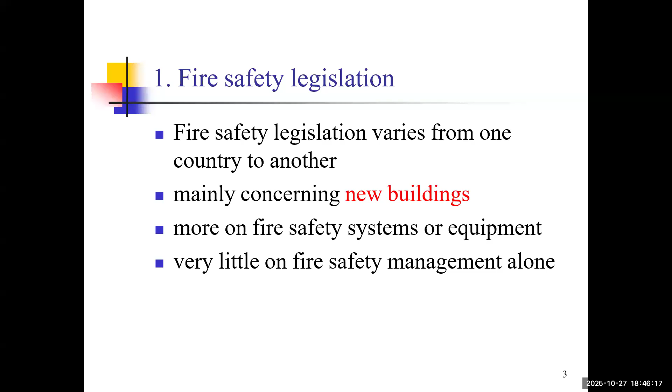Despite the differences we have just mentioned, close analysis reveals that several common features run through most international fire safety frameworks. The first is that legislation typically applies more to workplaces and public buildings rather than private homes, reflecting a greater concentration of risk and public responsibility.

The primary focus is definitely on life safety, that is, ensuring the survival and safe egress of occupants, rather than on protection of the building structure or its contents. This often has a beneficial secondary effect: building standards for the safety of firefighters and for prevention of the spread of fire to adjacent areas are also a consideration.

And importantly, most countries and states operate two different systems, treating new buildings and existing buildings differently under their legal framework, because of the practical and economic challenges of retrofitting safety features into old structures.

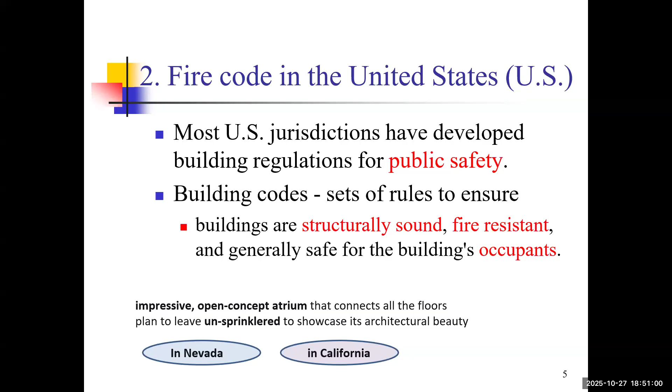But if you submit the exact same design to California, the authorities would likely reject it. Why would they reject your design? Because in California, the code has a blanket rule stating all atriums must be protected by an automatic sprinkler system, with no exception for engineering analysis in such particular cases.

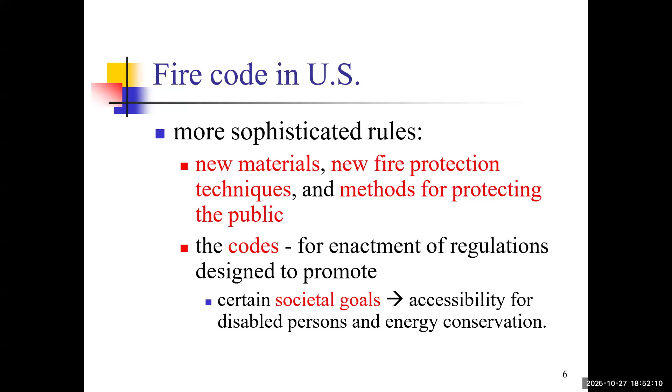The sophistication of the modern US fire codes reflects an ongoing and necessary adaptation to a changing world. They continuously integrate knowledge about new materials, innovative fire protection techniques, and evolving methods for protecting a diverse public. Interestingly, the function of these codes has expanded beyond their primary fire safety instruction to serve broader society goals. It is now common for building and fire codes to include provisions that promote accessibility for disabled persons and incorporate energy conservation measures. This expansion demonstrates how fire safety codes or regulations can act as a powerful driver for positive social change and sustainability, far beyond their immediate purpose of life safety.

In order to truly understand the US system, we must capture its defining characteristic, which is significant regulatory fragmentation. There is no single national code, no single national fire code. Instead, there are multiple overlapping sources of regulation and numerous pathways for the publication of standards.

If we consider the foundation structure, in the US we have 50 states, and each state has its own constitution and legal system. Within this constitution and legal system, the state can delegate the authority for fire safety regulation further down to local communities. This creates a very complex and multi-layered patchwork of requirements. For people designing buildings, this means that the rules can change literally from one town to the next. What's fine in one city might be illegal in the next city. That is a big problem.

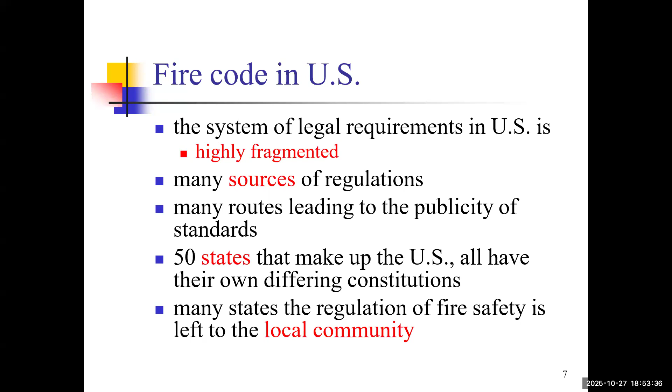This presents particular difficulties for design professionals and corporations working across multiple jurisdiction boundaries. So the US system is fundamentally self-regulatory in nature, meaning that the primary responsibility for most public health, safety, and welfare regulation falls to state government, which in turn often delegates to local and regional jurisdictions.

So what does this mean? This creates both valuable flexibility and considerable complexity in implementation, requiring a highly specialized understanding of local laws for successful project delivery. For example, a national retail chain must ensure that each of its stores complies with the specific fire code of that city or county.

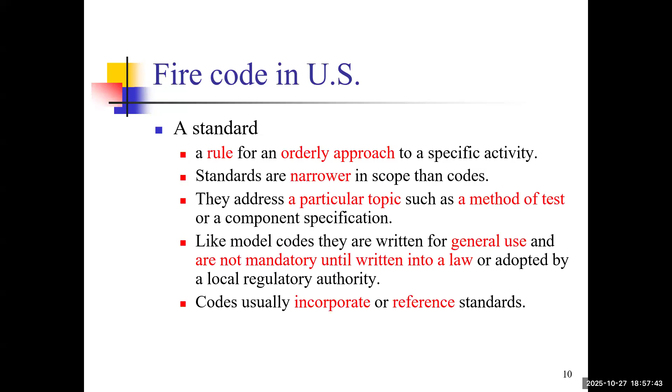Like model codes, standards are written for general use but are not mandatory in themselves. They only become legally enforceable once they are written into law or adopted by local regulatory authorities. In practice, codes usually incorporate even hundreds of these specialized standards, creating a very complex hierarchy where the standards provide the technical details that support the broader legal objectives of the codes. That is the main difference between codes and standards.

The development of these influential model codes is not a top-down process. It relies fundamentally on consensus building among a wide range of interested parties to achieve broader acceptance. This process requires common agreement among stakeholders, including engineers, architects, firefighters, and manufacturers, on what constitutes the appropriate approach, design, and implementation for a specific fire safety element.

The consensus standards, as we mentioned before, are developed under procedures that generally meet strict criteria to ensure due process and to avoid any restraint of trade. This inclusive process is designed to create robust standards that balance the various stakeholders' interests while maintaining scientific-based safety requirements, leading to more widely supported and effective regulations.

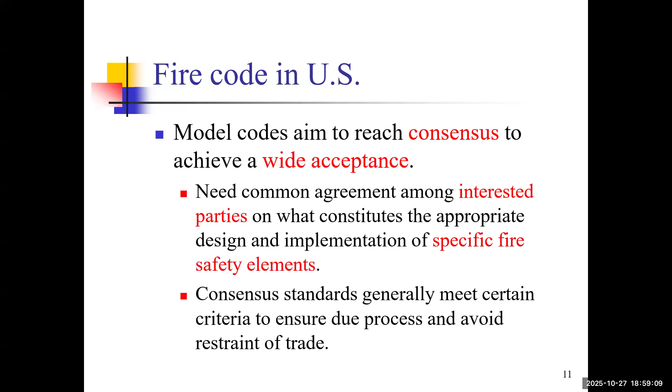It is important to recognize that the term consensus can represent varying degrees of agreement depending on which parties are represented and have voting rights in the standardization process. Some standards are developed with near universal participation from all affected sectors, leading to a strong consensus. Others may be developed by a more limited group, and this variation ultimately affects the acceptability of the resulting standard within the broader professional community.

A standard developed without input from a fire service or material scientist might face challenges and be adopted less widely, potentially creating gaps in safety or conflicting requirements in this field. So the key concept in this slide is the various degrees of consensus. We don't have only one level of consensus, but several varying or limited groups that establish this kind of consensus through voting rights in the standardization process.

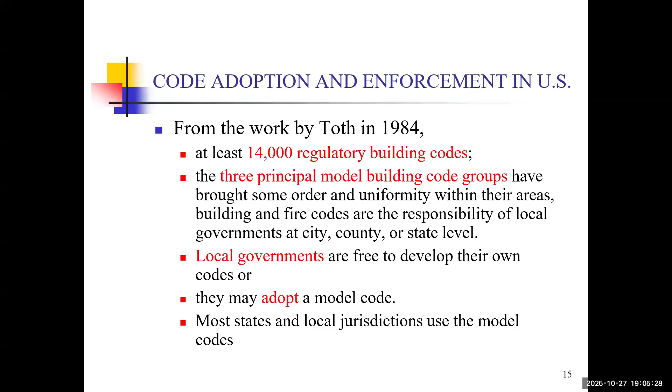The ultimate responsibility of building and fire codes still rests with local government at the city, county, or state level. This local government retains the freedom to either develop their own unique codes or adopt a published model code. This adoption-with-amendment approach means that even when using a model code, local variations still persist, because they have their own rights to develop, modify, and even adopt a published model code.

So a traditional and important distinction exists between building codes and fire codes in terms of their content, enforcing authorities, and periods of application.

Typically, the local building department is responsible for the initial phase. What's their duty? They review the construction plans to ensure that a new building meets the requirements of the building codes, and they inspect the completed structure for compliance before issuing an occupancy permit. Once that occupancy permit has been issued, the building department's direct responsibility largely ends.

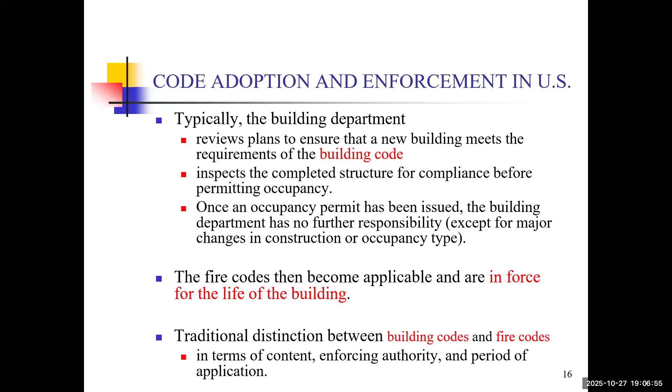At this point, the fire codes become the primary applicable regulations and remain in force for the entire life of the building. Enforcement then typically shifts to the fire department or fire marshal, who conduct periodic inspections to ensure ongoing compliance of the building to the fire codes.

So we mentioned the fire marshal. What does it mean? The key figure in this ongoing enforcement is the fire marshal, who acts as the chief fire prevention officer within a state. In states that have adopted a statewide fire code, you will typically find an office of the fire marshal within the state's governmental organization.

The fire marshal's duties are extensive. They are often charged not only with enforcement, but also with the critical responsibility of fire investigation to determine origin and causes. In most jurisdictions, it is the fire marshal or an equivalent official who has ongoing responsibility to maintain fire safety in existing buildings occupied by the public, ensuring that fire alarms, sprinklers, and other fire safety systems are properly maintained throughout the building's life.

To help coordinate this decentralized system, the National Association of State Fire Marshals was formed in 1989. This organization represents its members, who are the most senior fire officials from each state and their staff. Through such a collective body, common and uniform communications could be established effectively through every state. This organization provides a common forum for problem solving, collaborative research, and other professional development.

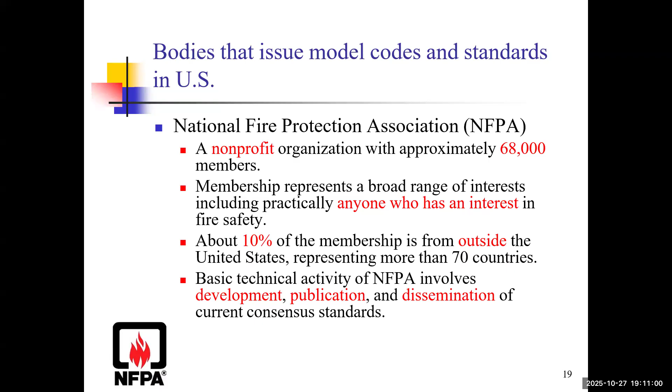So you may ask, does the NFPA write the codes itself? You can think about it. Because we mentioned it involves development and publication, does this organization write the code by itself?

Think about this question, and let's look at today's digital age. NFPA has made significant steps in ensuring its library of information is accessible. It provides extensive digital resources, most notably through its National Fire Codes subscription. This online database is a powerful tool designed for professionals who play an important leading role in implementing and enforcing codes. It provides convenient access to the entire library of NFPA codes and standards, helping users keep the most up-to-date information literally at their fingertips.

NFPA maintains a very extensive profile of more than 291 technical documents, developed by 211 technical committees comprising more than 5,500 volunteer individuals. It should be noted that these are volunteer individuals. So that answers the question: does the NFPA write the code itself? No, the code is written by volunteer individuals.

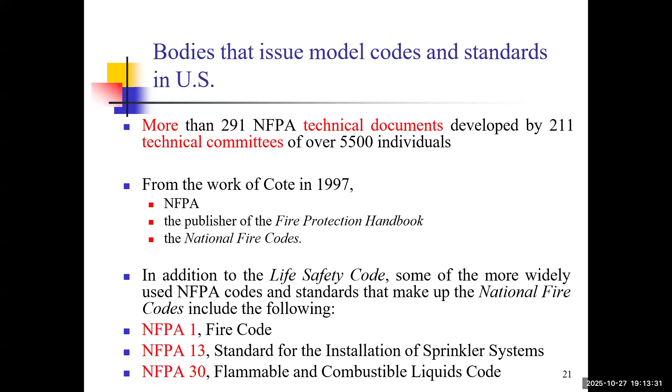Okay, so here is another list of essential standards and specialized documents. You can take a photo of these.

Okay, let's move to our first question, a single choice question: what is the primary function of the National Fire Protection Association, NFPA? You have two minutes to think about this question and give an answer.

Okay, this question is very easy, let's take a look. Choice A: to enforce fire codes at the federal level in the United States. B: to manufacture and sell fire safety equipment globally. C: to develop, publish, and disseminate consensus standards on fire safety. D: to provide emergency response service to local fire departments. So which one do you think is correct?

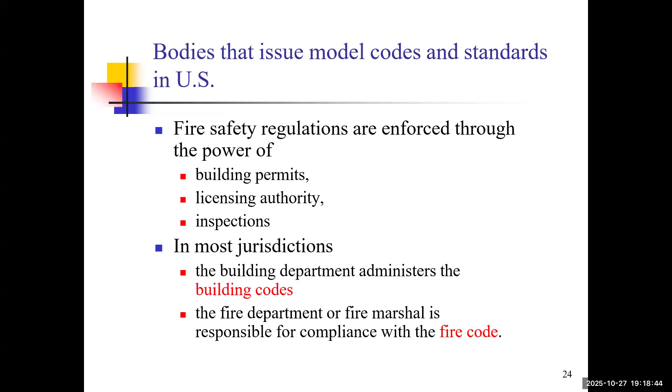So let's take an example. Imagine a few years from now, a new type of fast charging battery for electric scooters becomes very popular. We start seeing fires occurring when these scooters are charged in apartment building corridors, and they block the escape routes. So how does the NFPA process address this new hazard? For the first step, a fire marshal from a major city who has witnessed such an incident submits a formal proposal to the relevant NFPA technical committee. The proposal suggests adding a new clause that charging of personal mobility devices in common corridors and exit enclosures will be prohibited. But it's not quite correct as written.

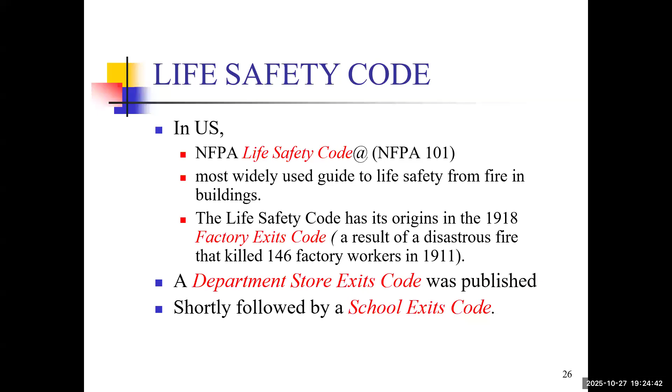A defining characteristic of the Life Safety Code is that it deals with existing buildings in detail. It is thoughtfully divided into separate chapters for both new buildings and existing structures of various occupancy types. This is critically important because the fire safety challenges in an old existing building can be very different from those in a new and innovative building.

The United States federal government mandates compliance with the Life Safety Code for all health care facilities that treat Medicare patients, precisely because of the code's comprehensive and practical coverage of existing buildings, which ensures a baseline of safety for more vulnerable populations.

A major revolution in the Life Safety Code was the introduction of the formal performance-based option in its 2000 edition. This represents a significant philosophy shift. In this approach, fundamentally, the life safety objectives of the code are first translated into several specific performance criteria. Rather than following a prescriptive checklist, the designer can use fire models and other advanced computational methods.

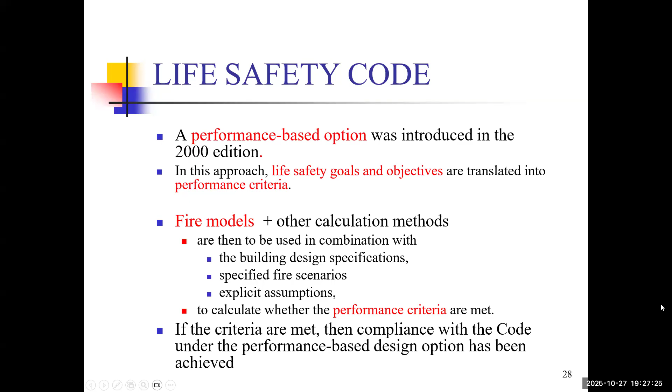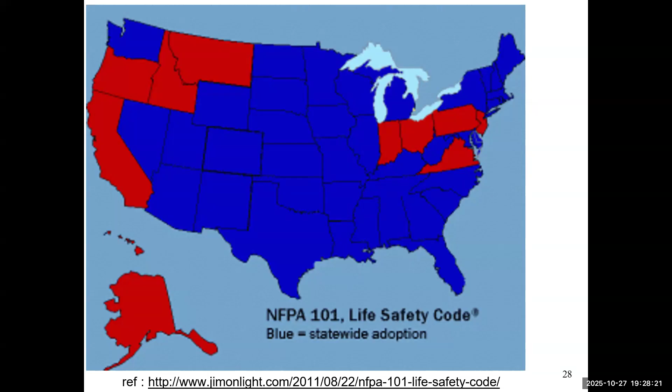The influence of NFPA 101 is visually demonstrated by its widespread adoption across the United States. As this map shows, many states, indicated in blue, have adopted the Life Safety Code on a statewide basis. This level of adoption underscores the code's status as a national benchmark for life safety, providing a significant degree of uniformity across the United States. As future professionals, you should understand that the provisions of NFPA 101 are essential, as it will likely be a key compliance document for a wide range of projects you will encounter.

Before the consolidation of United States model codes, three principal regional organizations played very critical roles in issuing model codes and standards. The first was the International Conference of Building Officials, or ICBO. This organization was unique because it was owned and controlled by its member cities, counties, and states, which tended to be heavily concentrated in the western United States.

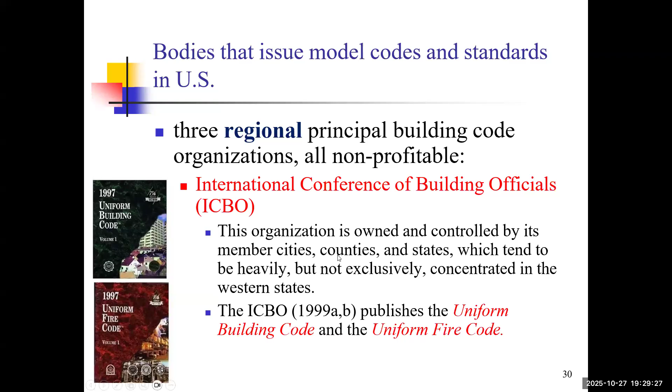The ICBO was responsible for publishing and maintaining two critical documents: the Uniform Building Code and the Uniform Fire Code. These codes formed the regulatory foundation for construction and fire safety across much of the western United States for decades. For the Southeast United States, the dominant organization was the Southern Building Code Congress International, or SBCCI. This organization also functioned as a professional society for building officials and code administrators. A major aim of the SBCCI was to develop basic code provisions specifically appropriate for the distinct climate and building traditions of the southeastern states.

Considerations like hurricane resilience and high humidity were central to its work, and its membership was largely drawn from the southeastern states. The SBCCI published its own set of model documents, the Standard Building Code and the Standard Fire Code, which were tailored to the needs of its region and were widely adopted there.

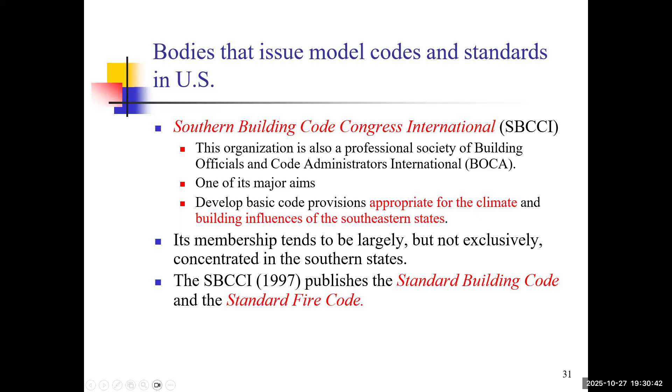The last regional codes group was the Building Officials and Code Administrators International, or BOCA. BOCA operated as a service organization dedicated to professional code administration and enforcement. Its active membership was open to governmental units involved in formulating or enforcing construction, fire safety, and land use regulations, and its influence was most heavily concentrated in the northeastern and midwestern states. To serve this vast region, BOCA published and maintained the National Building Code and the National Fire Codes.

It is important not to confuse these with the Canadian codes of the same name. This was a distinct document that addressed the specific regulatory needs of the colder and more densely populated Northeast and Midwest states.

Now let's come to the most important body, that is the International Code Council. The International Code Council was established in 1994, and the ICC was created as a non-profit organization with a clear and ambitious mission. So what will be its mission? It aims to develop a single set of clear and comprehensive national construction codes for the nation.

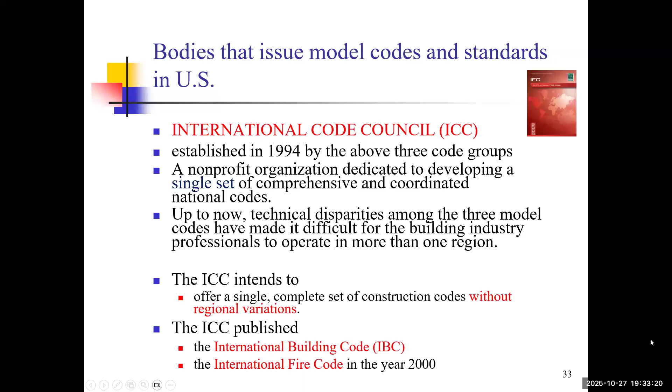Up to this point, the technical disparities among the three model codes had made it difficult for building industry professionals to operate in more than one region. The ICC's intention was to offer a single, complete set of construction codes without regional variations. A major milestone was reached in the year 2000 when the ICC published the first editions of the International Building Codes (IBC) and the International Fire Codes (IFC).

The philosophy of ICC is maintaining an open and participatory process for code development. Any interested individual or group, whether an engineer, a builder, or a member of the public, may submit a manuscript, that is a formal code change proposal, for consideration by the ICC's Code Development Committee. Once the proposal is received, it is first checked for completeness, and accepted or administratively corrected proposals are then published and made available to the entire membership for their review. This ensures the potential change is checked by a wide audience of experts and stakeholders long before they are voted on.

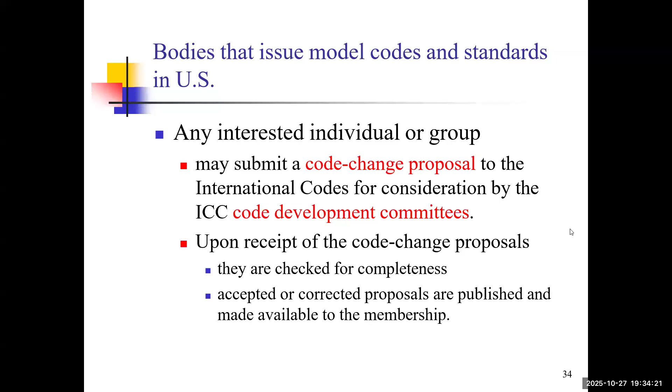The ICC process also includes a formal mechanism for challenging the recommendation of the code development committees. All interested parties are invited to file such a challenge, which is also published before consideration. This challenge provides an opportunity for the interested party to testify and present their case at the public hearing held during the ICC annual conference. The final action on all challenged code change proposals is then based on a vote by the eligible voting members, primarily the governmental building and fire officials present at this annual conference. This body adopts the proposed change as part of the code or rejects it. These final actions are then incorporated into the next supplement or edition of the code, ensuring the code remains dynamic and responsive to new technology.

Okay, so here comes our second question. What was the primary goal of forming the ICC? You have 2 minutes to look at this question. It is also a single choice question.

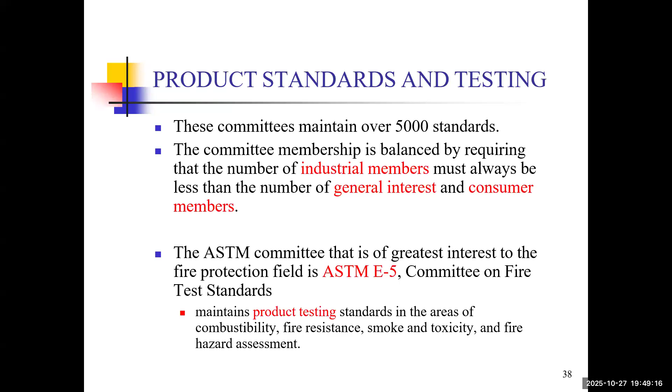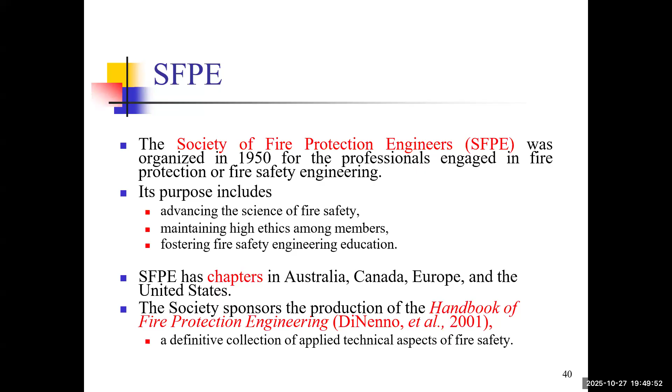This prevents any single interest group from dominating the process. For the professional practice of fire safety engineering, the Society of Fire Protection Engineers, SFPE, is the central professional organization. It was organized in 1950 to serve professionals engaged in the specialized field of fire protection and fire safety engineering. It has chapters in Australia, Canada, Europe, and the United States.

It is also important to recognize the other major United States engineering societies that produce standards serving directly or indirectly the fire safety evaluations, such as ASCE, ASME, and ASHRAE. This network of specialized standards creates a comprehensive web of safety knowledge.

Now let's come to the insurance industry. The insurance organizations have played a fundamental and often overlooked role in the development of fire safety standards in the United States. The National Board of Fire Underwriters, NBFU, for instance, actually developed the first U.S. model building code and originated many of the fire safety standards that now fall within the scope of the NFPA.

The industry, comprised of hundreds of individual companies and associations, maintains a strong and active presence in the area of requirements for property protection.

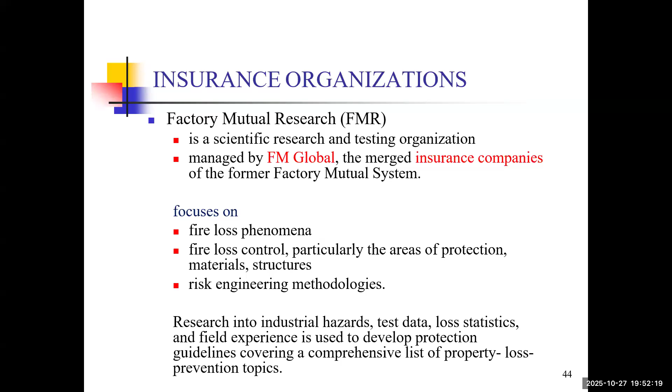The research into real-world industry hazards, combined with extensive test data, is used to develop highly detailed and practical protection guidelines. These guidelines cover a comprehensive list of property loss prevention topics and are widely respected and used by industries with higher hazard operations to protect their facilities far beyond the minimum of the building code.

This property conservation standard, developed by Factory Mutual Research, is accepted by a wide variety of jurisdictions due to its research-based foundation. So beyond setting standards,

FMR also maintains a third-party product certification service. Loss prevention products and materials, from sprinklers to fire-resistant coatings, are tested and must be approved for listing by FMR before they are recognized within its protection guidance. We know that this FM approval mark is a highly trusted symbol in the industry of fire protection.

The Insurance Services Office, or ISO, operates in a different but equally important role. Insurance in the United States is regulated by individual states, and the ISO functions according to state laws as several key entities. It acts as an insurance rating organization, an insurance actuarial service, and an advisory organization.

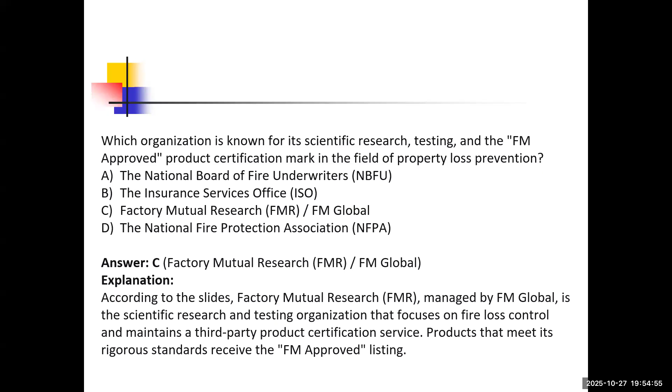Now let's come to our questions. Which organization is known for its scientific research, testing, and the FM-approved product certification mark in the field of property loss prevention? We mentioned this before regarding property loss prevention. I think it's very easy because it is Factory Mutual Research. We mentioned about the research and testing, and it is highly related to the FMR field of function.

And OSHA has issued its own standards, such as the standard for the management of the process hazard of highly hazardous chemicals. These standards require a comprehensive program to prevent or reduce the risk of major industrial incidents that might expose employees to the hazard of toxic fire.

Also, we have the Consumer Product Safety Commission, established in 1972. The aim of the CPSC is to protect the public against unreasonable risk of injury from consumer products. The CPSC assists consumers in evaluating the comparative safety of products, and develops uniform safety standards to minimize conflicting state and local regulations.

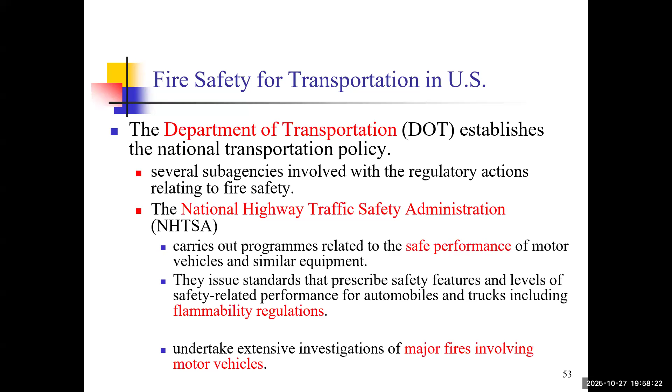Other transportation modes have their own specific regulations, such as the Federal Aviation Administration, which holds responsibility for fire safety and has detailed regulations for the control of flammability of combustible materials used in aircraft interiors.

The FAA is also deeply concerned with crashworthiness, which is the ability of an aircraft structure to protect the occupants during a crash. The FAA is also concerned with the prevention and control of any ensuing post-crash fire.

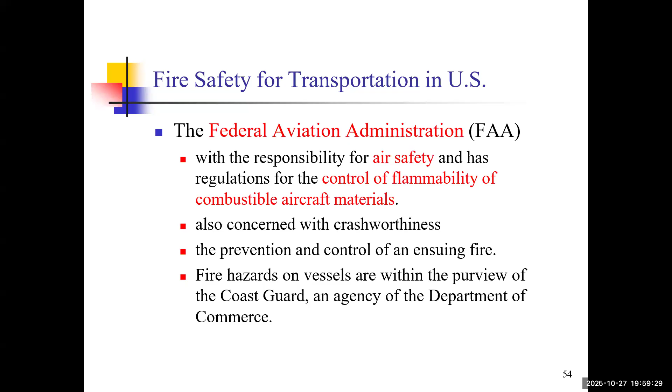Meanwhile, fire hazards on vessels, from commercial ships to recreational boats, are also within the scope of the Coast Guard, which is another transportation safety agency in the United States.

Its mission covers preparing for and responding to the full range of emergencies, such as natural disasters, man-made incidents, and nuclear events. This includes hazard mitigation to reduce long-term risk, coordinating relief operations, and providing recovery assistance.

FEMA's National Emergency Training Center maintains an extensive collection of references on emergency management.

Within the FEMA structure, there are two units uniquely concerned with fire safety: the United States Fire Administration and the National Fire Academy. The National Fire Academy is the nation's premier institution for fire service education. The NFA conducts residence and outreach training courses for fire service personnel and develops training and instructional materials for our firefighters.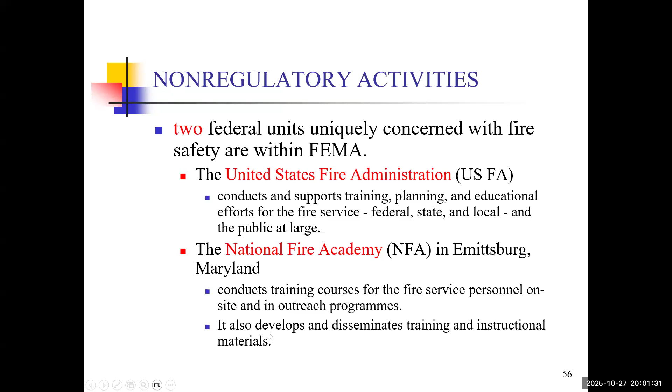Another United States organization is the National Institute of Standards and Technology, known as NIST, which plays a unique and indirect role. Unlike the organizations we have discussed, NIST does not develop mandatory fire safety standards itself.

Instead, it contributes to the technical foundation upon which those standards are built, providing technical support. A major component of NIST serves as an important point of fundamental and applied fire research in the United States, including a multidisciplinary technical staff supported by world-class testing laboratories and an advanced research library, conducting science that helps standard committees make evidence-based and informed decisions.

Let's make an example. When we consider a type of fire-resistant glass, a manufacturer claims that it is safe for use in office building stairwells. The code committee needs to know: does it actually work? This is where NIST provides the essential proof.

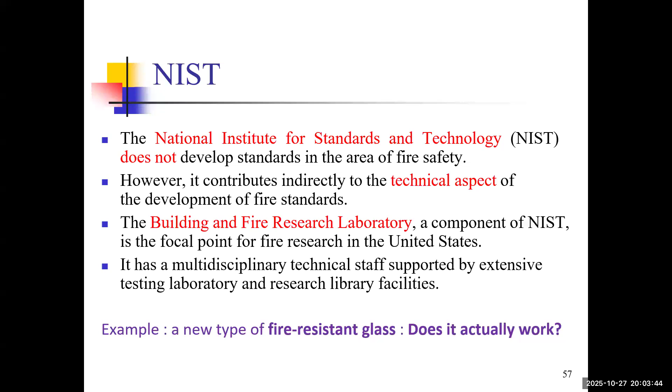So in summary, the United States system is characterized by a fundamental division of labor. The federal government does not draft or enforce building and fire regulations at the state or local level. Instead, several private and non-profit organizations, most notably the International Code Council (ICC) and the National Fire Protection Association (NFPA), take the lead in drafting these comprehensive codes and standards. These model documents are then made available for voluntary adoption by states and local governments.

Historically, the major building and fire codes used across the United States were a variation of one of three regional model codes: the Uniform Building Codes from ICBO, the Standard Building Codes, and the National Building Codes.

You can take a picture of these slides. The three organizations that developed these codes made a landmark decision to merge their effort under the newly created entity called the ICC. This consolidation was formally completed in 2003.

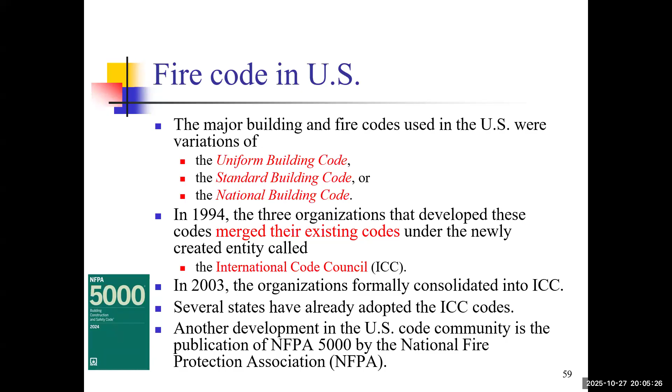We also have a parallel development like the NFPA and the Building Construction Safety Code, creating a competing unified set of model codes.

Both of the major code bodies, ICC and NFPA, have actively pursued the development of performance-based codes, and they have taken different approaches to achieve this. ICC has published a standalone comprehensive performance code called the ICC Performance Code for Building and Facilities. But NFPA has chosen to incorporate a performance option directly into its flagship building codes like NFPA 5000.

It is crucial to understand that in both approaches, the traditional prescriptive documents will continue to be supported and remain the primary compliance path for the majority of projects, as they provide very clear and well-understood objectives and methods to achieve safety.

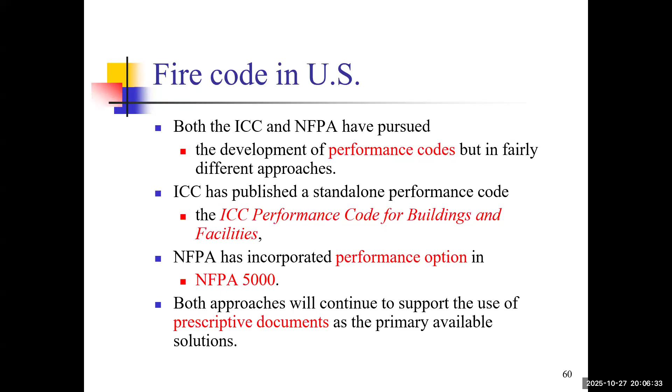The specificity of the NFPA work is evident in its extensive publication catalog, and this includes updated standards like NFPA 13 and several other standards developed by NFPA.

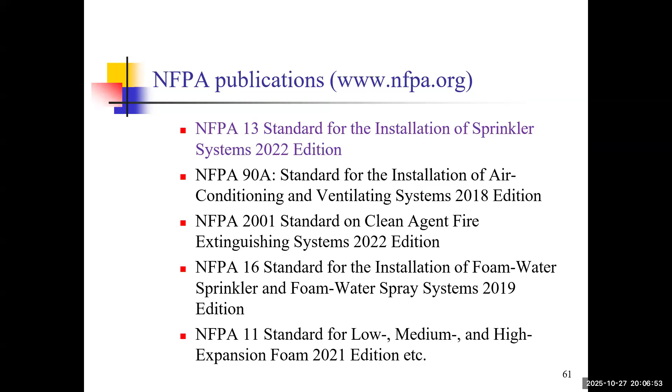Now let's look at this question: what is the fundamental characteristic of how building and fire regulations are created and enforced in the United States? You can look at this question and think about it.

So which one do you think is the correct answer? The federal government writes and enforces a single national building code. The state governments completely control the process without any local input. Private organizations develop model codes that are adopted by state and local governments. The international standards from ISO are directly implemented as United States law. So which one do you think is correct?

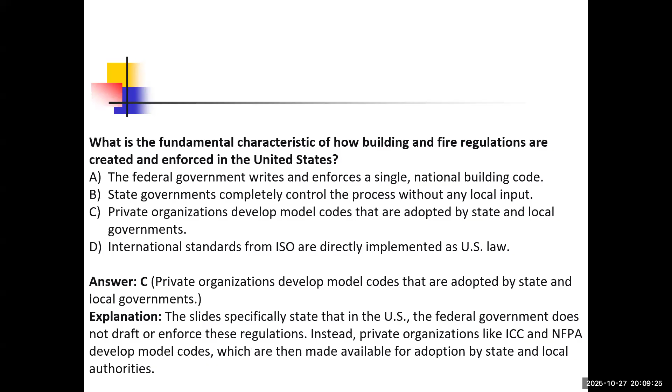Now let's finish our United States fire codes and move our focus to Canada, where we find a system that effectively balances national coordination with territorial implementation. The National Research Council of Canada, NRC, publishes a number of national model codes that serve as the basis for regulation across the country.

The most important of these are the National Building Code of Canada, NBC, which provides the minimum requirements for health, life safety, and structural sufficiency in new buildings. The other one is the NFC, which provides the minimum fire safety requirements for buildings, structures, and areas where hazardous materials are used, ensuring an acceptable level of fire protection and prevention during a building's ongoing operations.

It is vital to understand that these national codes are model documents only. They do not have legal force in themselves. They must be formally adopted by an authority having jurisdiction, typically a provincial or territorial government, in order to come into effect as law.

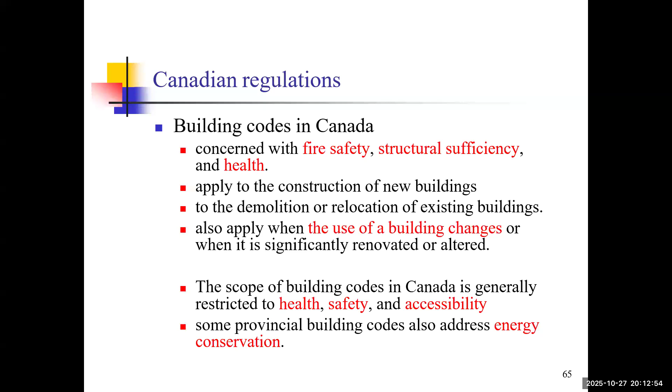So the fire codes in Canada generally apply to buildings that are already in use, regulating the day-to-day activities that can cause fire hazard. So they impose ongoing duties, such as the requirement to properly maintain the fire safety equipment and the egress facilities, and they control the combustibility of furnishings and decorations. And they also provide for the safe use, storage, and handling of combustible material and dangerous goods in both new and existing buildings.

So a critical requirement is the development and implementation of a fire safety plan in anticipation of emergency. So the aim of the fire codes is twofold: to reduce the likelihood of a fire starting and to limit the damage and community impact if the fire does occur.

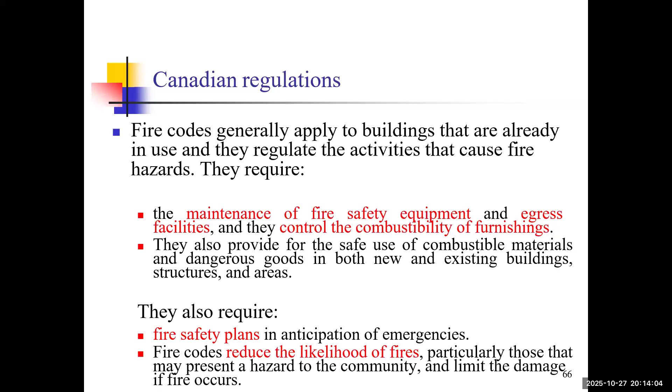So the Canadian Commission on Building and Fire Codes, we call it CCBFC, is now the central body responsible for preparing and maintaining both the NBC and the NFC, which are published by NRC. So CCBFC produces these recommended model codes for adoption by the appropriate authorities. So the Institute for Research in Construction within the NRC provides the essential technical support for the CCBFC. So these services are coordinated by the Canadian Codes Center, which also acts as the vital communication link between the communities and the specialized researchers, and provides information to code users on scope and application.

So the national model codes documents are developed and maintained using a broad-based consensus process. As we learned before, in the United States system, we also develop the standards and codes based on consensus. And in Canada, we also use the broad-based consensus process. So this philosophy ensures that individuals from all segments of the construction industry, from the regulators and the firefighters, and also engineers and building owners, have a meaningful opportunity to influence the change of the codes.

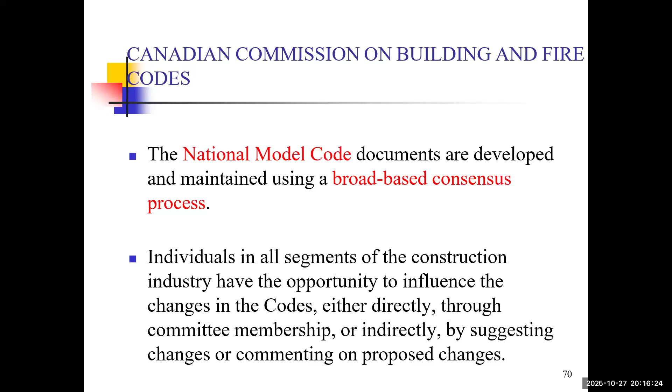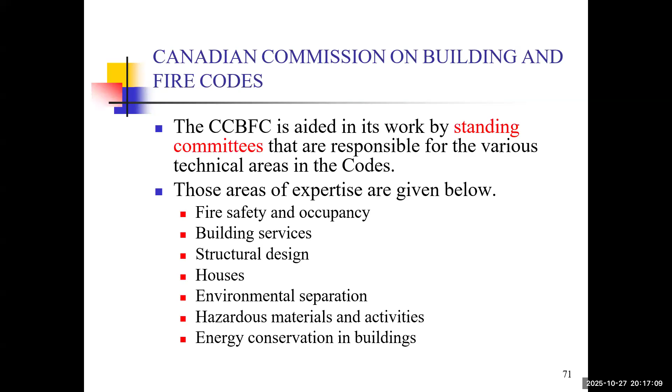So the work of the CCBFC is aided by a series of standing committees, each responsible for a specific technical area within the code. So this area expertise reflects the comprehensive nature of the documents, and these areas include fire safety, building service, housing and small buildings, hazardous materials, and energy conservation. So this committee structure ensures that each technical area receives dedicated and expert attention during the code development and revision process.

So the standing committees do not work alone. They rely on more topic groups and task groups for focused advice on areas of special interest within the committee's jurisdiction. So on the one hand, we have the topic groups. The topic groups are ongoing, addressing persistent areas of need, while the task groups are formed with short-term specific objectives to solve particular problems. So expertise from outside the standing committee is active for both types of groups.

The members of all these committees and groups are drawn from all segments of the construction industry, ensuring a balance of perspective, and in total over 200 volunteers work on these kind of 25 committees.

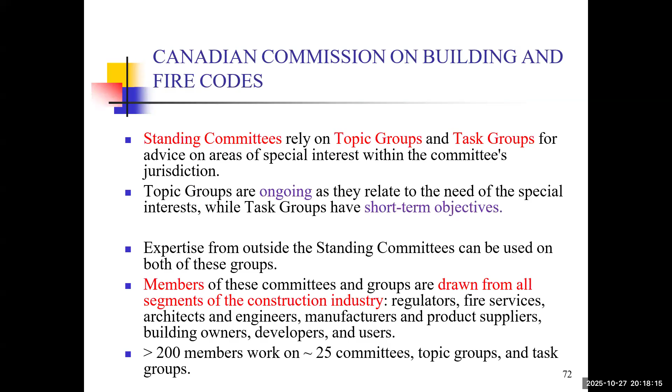Okay, so now let's come to our questions. How does the CCBFC develop and maintain the national model codes? Through a closed process involving only government officials, or by adopting American standards without modification, or using a broad-based consensus process with industry participation, through direct voting by the general public.

So it's very easy, right? Using a broad-based consensus process with industry participation. The participation will come from all segments of the construction industry. So that is the key point of the CCBFC.

Okay, so the standing committee maintains an open door policy for suggestions from any source, whether from industry professionals, researchers, or a member of the public. However, for a suggestion to be seriously considered, it must be supported by valid technical argument and data. So the committees are explicitly directed to be influenced by sound science and engineering principles, and are unlikely to be influenced by non-technical arguments related to commercial consideration. So this ensures the code development process remains objective and focused on its core mission of fire safety.

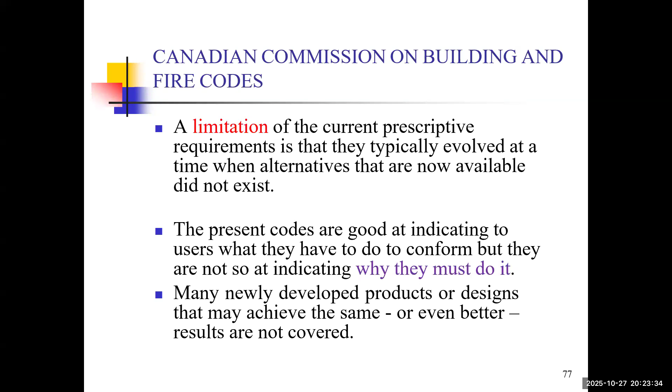Here is the limitation of the current prescriptive requirements: they typically evolved at a time when some alternatives that are now available did not exist. So at that time we need to propose some performance-based standards or codes, because in modern buildings we may have innovative designs that were not available when the current prescriptive requirements were developed. The present codes are good at indicating to users what they have to do to conform, but not so good at indicating why they must do it. Many newly developed products or designs that may achieve the same or even better results are not covered. That is why we need some performance-based codes.

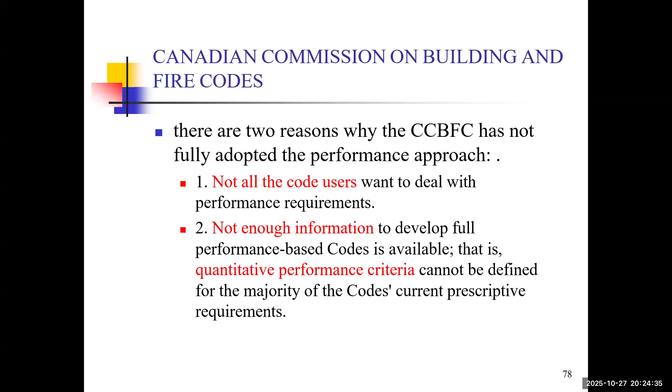But CCBFC has not fully adopted a pure performance-based approach, for two primary reasons. The first is that not all code users, including many builders, inspectors, and designers, have the expertise to deal with the complexity of the performance requirements. They prefer the clarity and certainty of prescriptive rules. The second, more fundamental reason is that there is not enough scientific information available to develop a full performance-based code for all building aspects. So for current prescriptive requirements, quantitative performance criteria cannot be defined with sufficient confidence to base compliance solely upon them.

So the solution developed by the CCBFC was the innovative objective-based code. They proposed another concept, which we call the objective-based code. This concept served as a bridge between the prescriptive code and the performance-based system, and it is built on five major points, which you can take a look at after the class.

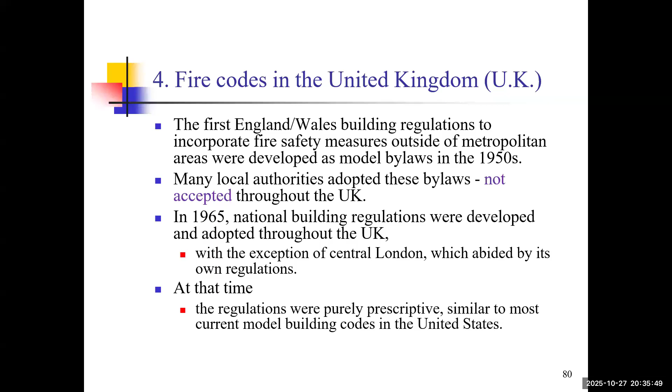A major step came in 1965 with the development and adoption of the national building regulations throughout most of the UK, with Central London initially writing its own unique regulations. At that time, these national regulations were purely prescriptive, similar in nature to the model building codes used in the United States.

A reform occurred in 1985 when the UK moved to a system of building regulation based on functional requirements rather than detailed prescriptive rules. These requirements are outlined in Part B, Fire Safety, of Schedule 1 to the Building Regulations for England and Wales. This high-level, goal-oriented framework is supported by a set of non-mandatory guidelines entitled the Approved Documents.

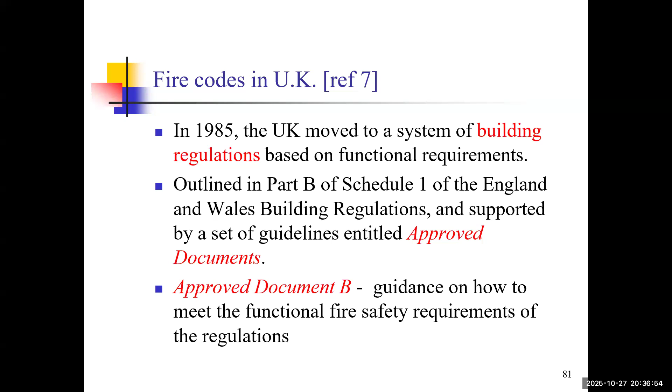So Approved Document B provides practical guidance on how to meet the functional fire safety requirements of the regulations. This movement gave designers much greater flexibility, focusing on outcomes rather than mandating the specific means to achieve it.

In addition to the Approved Documents, British Standards provide further, more detailed guidance for the design of various building components and systems. It's important to note that both the Approved Documents and the British Standards are recommended guidelines; they are not the law. So authorities having jurisdiction in England and Wales generally recognize that full compliance with these recommendations is not always possible, especially in some complex and innovative buildings.

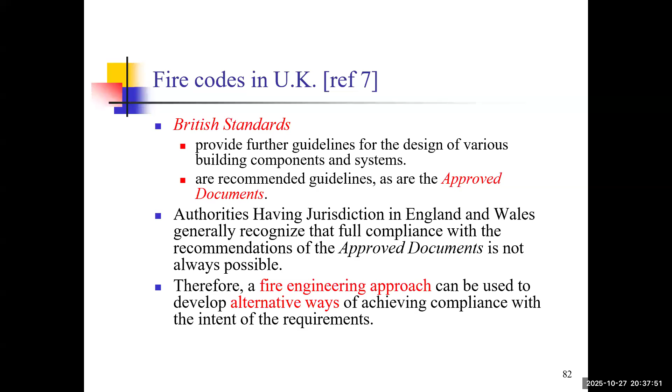So a fire safety engineering approach can be used to develop and justify alternative ways of achieving compliance with the intent of the functional requirements. Since the 1992 edition, the Approved Documents have formally recognized and allowed the use of an alternative approach to fire safety design, solidifying the role of fire engineering.

The British standard documents, particularly the PD 7974 series, provide the technical methodologies for applying fire safety engineering. As we learned in lecture 6, PD 7974 has much of the PDs, that is the documents, for our different areas of fire safety.

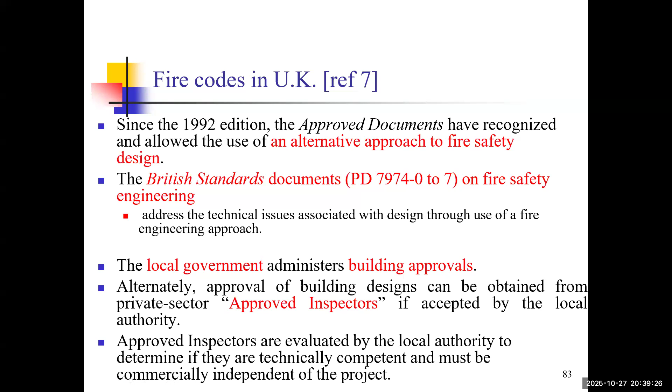Another key feature of the UK system is the option for building design approvals. Some local governments traditionally administer building approvals, and approvals can also be obtained from the private sector, that is, the Approved Inspectors. If accepted by the local authorities, the Approved Inspectors can provide their own approvals. These inspectors are evaluated for technical competence and must be commercially independent for any building project, which introduces an element of competition and choice into the regulation process.

So in the United Kingdom's building regulation system, what's the primary purpose of the Approved Documents? I think this is another very simple question. Which one would you think is the correct answer? To serve as the legally binding requirements that must be followed exactly, or to provide official guidance on how to meet the functional requirements of the regulation, or to replace the need of the fire risk assessment, or to outline international standards that override UK building regulations.

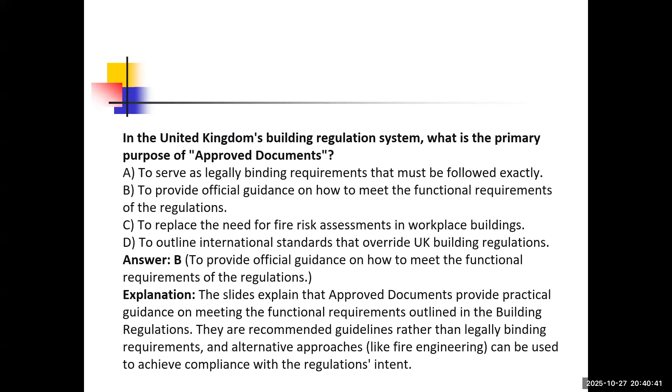So the answer is B, to provide official guidance on how to meet the functional requirements of the regulations. So the approved documents, and specifically Approved Document B, provide practical guidance on meeting the functional requirements outlined in the building regulations. They are not legally binding requirements, and there is an alternative approach.

The Fire Precaution Workplace Regulation 1997 and its amendment were a significant piece of legislation that applied to a much wider range of workplaces than any previous laws. Their scope was extensive, covering not only traditional offices and factories, but also some unique workplaces. You can take a look at this kind of fire precaution regulations.

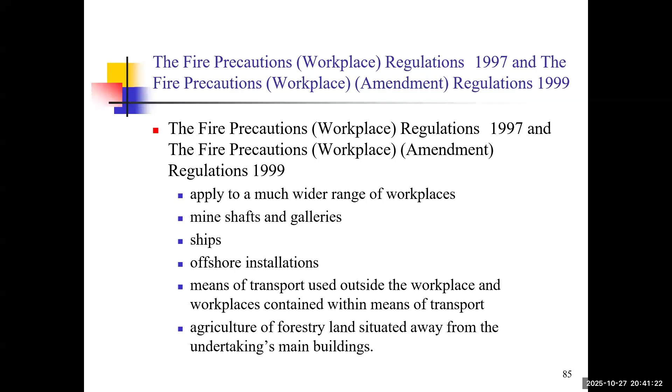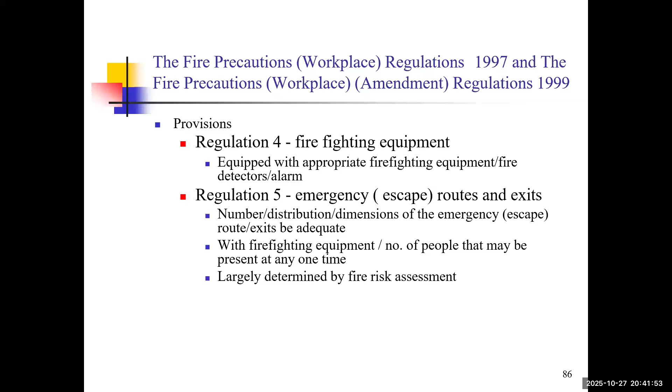These regulations contain several key provisions. Regulation 4 required that the workplace be equipped with appropriate firefighting equipment and fire detectors. Regulation 5 dealt with emergency escape routes, requiring that their numbers, distribution, and dimensions be adequate for the number of people present. And also we have Regulation 6, which imposes a vital duty regarding maintenance and planning.

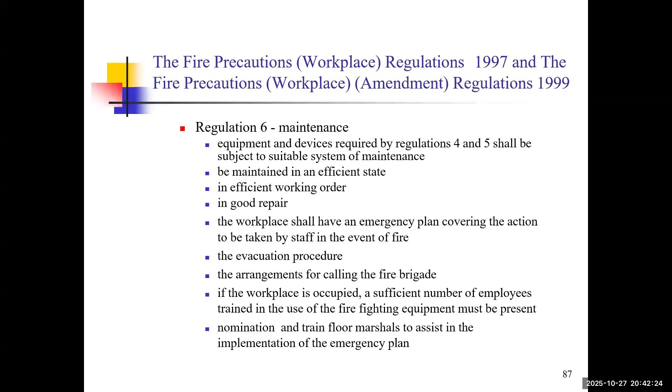A critical aspect was the specifics of what was adequate. This was largely determined by the findings of the mandatory fire risk assessment, which moved away from a one-size-fits-all approach to a risk-based approach.

The cornerstone of the entire regulation framework was Regulation 8, which placed an explicit duty on employers to carry out a suitable and sufficient assessment of the risk to the health and safety of their employees. The fire risk assessment was the foundational process that informed all other fire safety measures, from the number of extinguishers to the width of the exits. This emphasizes the principle that the person creating the risk is best placed to manage it, a philosophy that would later be expanded and reinforced.

To navigate this system, the Department of the Environment, Home Office, and the Welsh Office jointly published a building regulation and fire safety document. This document served as a procedural guide for all fire safety issues concerning the building and the building work, helping designers and builders understand their roles and responsibilities within the legal framework. It complements the technical guidance of approved document B by explaining the process of achieving compliance.

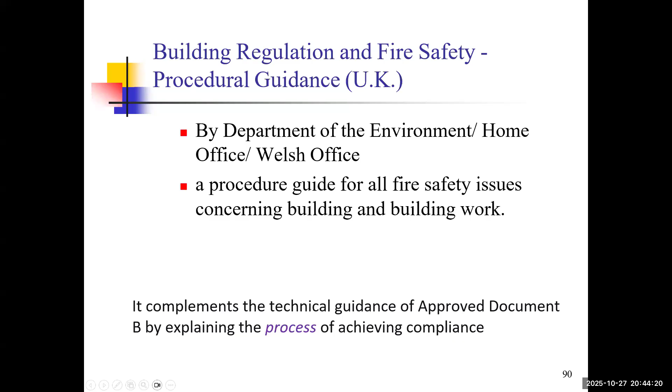A big change in England and Wales came with the Regulatory Reform Order, commonly known as the RRO. This order was designed to consolidate and simplify previous fire safety legislation, providing a minimum fire safety standard for all non-domestic places.

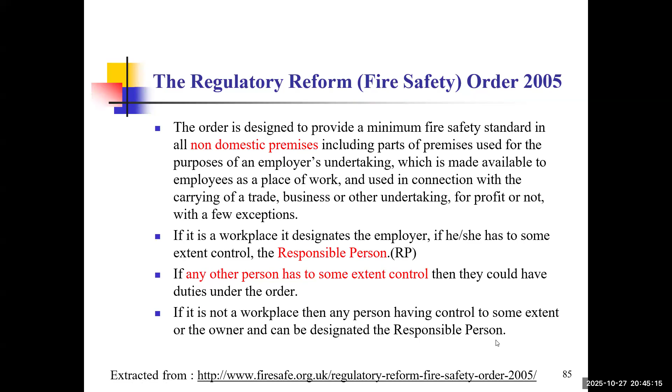It covers places used for an employer's undertaking and made available to employees as a place of work, or used in connection with trade and business. It designates a responsible person, that is RP, who is the employer of a workplace or anybody having control of the premises to some extent, placing the legal duty on their shoulders.

These guidance documents are practical and targeted. For example, there is a specific guide for offices and shops, another for factories and warehouses, and a detailed guide for sleeping accommodation, which covers hotels, guest houses, and common areas of flats. These guides help the responsible person, who may not be a fire safety expert, understand the typical hazards in their type of premises and the kind of control measures likely to be needed to comply with the law.

So the fire safety order is a comprehensive legal document. Please note this is a kind of legal document. So let's take a look at this structure.

Part one covers the general provisions, including the crucial definition of the responsible person, the meaning of general fire precautions, and the meaning of application to premises. So this part sets the stage and defines the scope, and the key players involved.

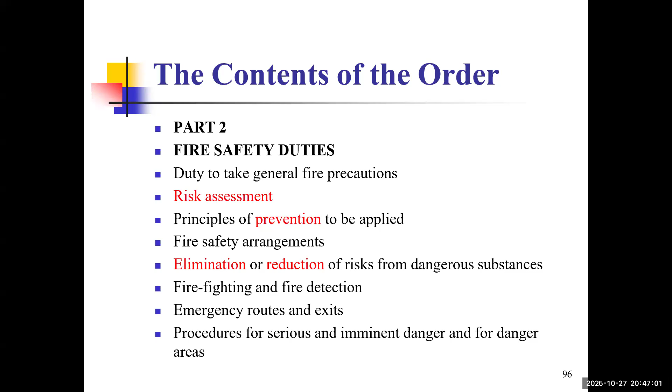Part two outlines the fire safety duties. These are the specific legal obligations for the responsible person, and it is a very important aspect, including the duty to take general fire precautions and to conduct a suitable and sufficient fire risk assessment. The duties in Part 2 extend further to ensure a comprehensive approach.

Part 3 of the order deals with enforcement. It details how the order is to be enforced and sets out the significant powers of the inspectors, and also allows fire officers to exercise those powers on behalf of the inspector. Critically, it provides for the issuance of formal notices, including the alteration notice for some high-risk premises, the enforcement notice requiring action, and the prohibition notice to restrict the use of the premises in case of serious risk.

Part 4 covers offenses and appeals, establishing the legal consequences of non-compliance.

Part 5 contains a range of important miscellaneous provisions. It defines civil liability for breach of statutory duty, the duty not to charge employees, and the duty to consult employees. So this is another part of the contents of the order.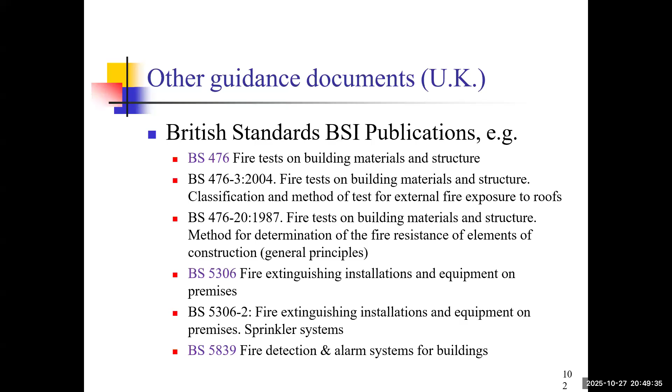Beyond the primary legislation, other guidance documents exist in the United Kingdom. The British Standards, as we said before, published by BSI, are of significant importance. Key examples include BS 476, which details fire tests on building materials and structures; BS 5306, which covers fire extinguishing installations and equipment on premises, with Part 2 specifically on sprinkler systems; and BS 5839, on the design, installation, and maintenance of fire detection and alarm systems in buildings. These standards provide the technical details that bring the functional requirements of the building regulations to life.

As a member of the European Union at that time, the UK heavily relied on standards developed by the European Committee for Standardization in Brussels. These European standards were often adopted as British Standards. Key fire-related CEN publications include EN 54-5 for heat detectors, EN 54-10 for flame detectors, and EN 1363, which sets out the general requirements for fire-resistant tests. This illustrates the multi-layered nature of standardization, where national standards exist within a broader international framework.

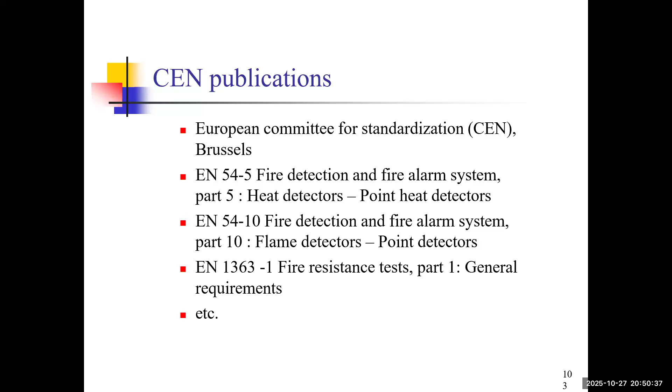Now let's look at the fire code in Australia. Australia is a federation divided into 6 states and 2 territories. In the early part of the 20th century, these states and territories had independently adopted their own building regulations as they saw fit, leading to a lack of uniformity.

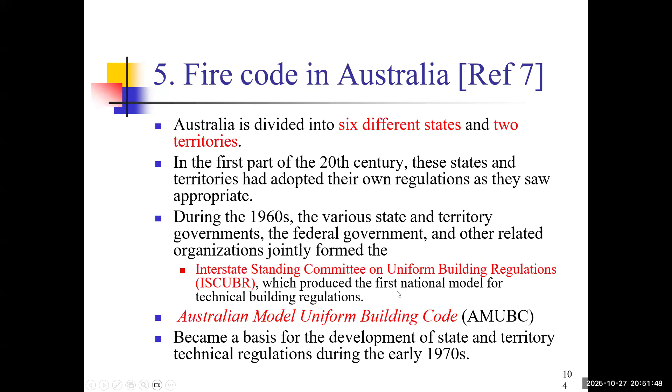A major push began during the 1960s when the various state and territory governments, the federal government, and other related organizations jointly formed the Interstate Standing Committee on Uniform Building Regulations. This body produced the first national model for technical building regulations, known as the Australian Model Uniform Building Code (AMUBC), which became the basis of state and territory technical regulations in the early 1970s.

In the 1980s, the Australian Uniform Building Regulation Coordination Council was formed to continue this work. This organization developed the first edition of the prescriptive Building Code of Australia, a landmark achievement as it was adopted nationwide in 1992. Two years later, this organization was replaced by another, the Australian Building Codes Board, to maintain and develop the BCA.

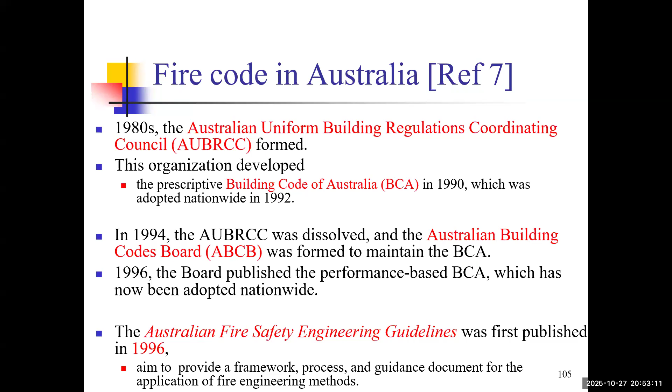This moment came in 1996 when the ABCB published a performance-based version — a big step from the prescriptive version to the performance-based version of the BCA, which has now been adopted nationwide. Additionally, the Australian Fire Safety Engineering Guidelines was first published in 1996, to provide a framework for applying fire engineering methods.

The key feature of the Australian system is the role of Standards Australia, a dedicated standards-writing body. These are private organizations similar in nature to the NFPA in the United States, responsible for developing specific technical standards that are then incorporated by reference into the BCA or other relevant legislation.

The performance-based BCA is well structured. It provides the deemed-to-satisfy prescriptive provisions, offering a straightforward compliance path — a building will be automatically deemed to satisfy the performance requirements of the BCA if it meets these prescriptive provisions, providing certainty, clarity, and ease of use.

However, the BCA also fully embraced innovation through an alternative solution. The building designer may choose to propose an alternative solution to the authorities in order to obtain approval for a different method of design of the structure. This requires demonstrating through engineering analysis that the alternative meets the performance requirement of the BCA. Traditionally, local government has been responsible for approving building design in Australia. However, in recent years, legislation changes have enhanced the role of the approved private practitioners in building design and the approval process.

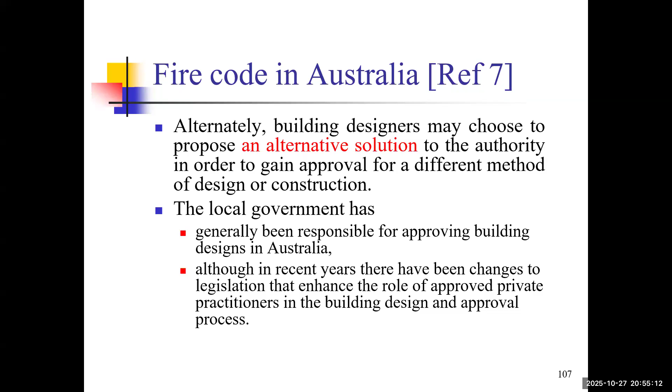Now let's look at the fire code in Japan. The Japanese system of building code has traditionally been similar in structure to that used by the United States. The cornerstone is the Building Standards Law (BSL), a prescriptive code that has been enforced since 1950. It was originally based on the United States Uniform Building Codes, developed by the International Conference of Building Officials. A separate fire service law was also developed to govern the active fire protection system.

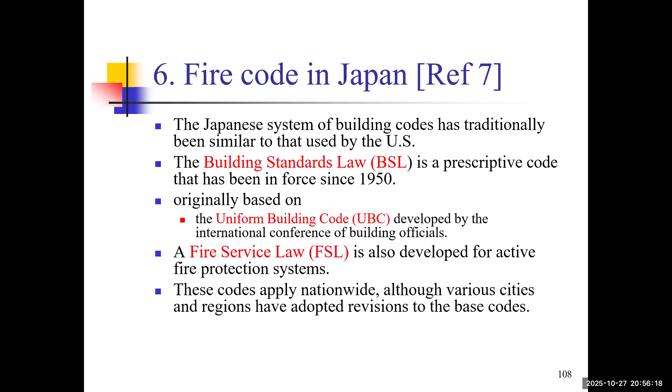This code applied nationwide, providing a high degree of uniformity. Also, various cities and regions have historically been permitted to adopt revisions to the base codes to address their local conditions, such as seismic activity or dense urban environments.

The BSL was amended in 1998 to include performance-based requirements, and this reformed document was adopted in June of 2000. This new code allows for 3 distinct alternatives for building design and approval.

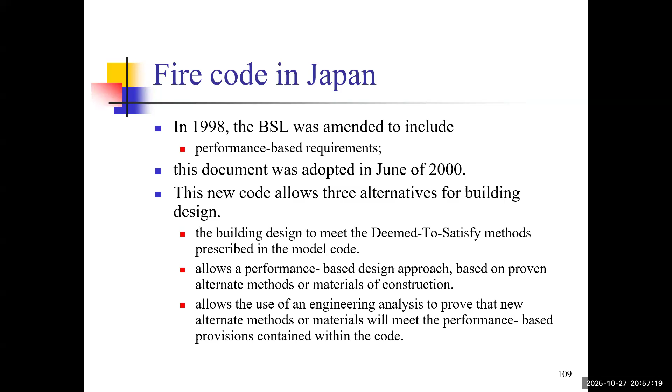The first is the traditional path: the building design can meet the deemed-to-satisfy method. The second allows for a performance-based design approach based on the proven alternate method. The third, and most flexible, allows the use of detailed engineering analysis to prove that a new, non-proven alternative method or material will meet the performance-based provisions contained within that code.

Finally, let's look at the fire code in Sweden, a nation with a long history of fire safety regulations. Sweden developed its first prescriptive rules for fire safety over a century ago, following several fires that swept through densely populated urban areas. This initial set of rules gradually evolved through several revisions of prescriptive building codes.

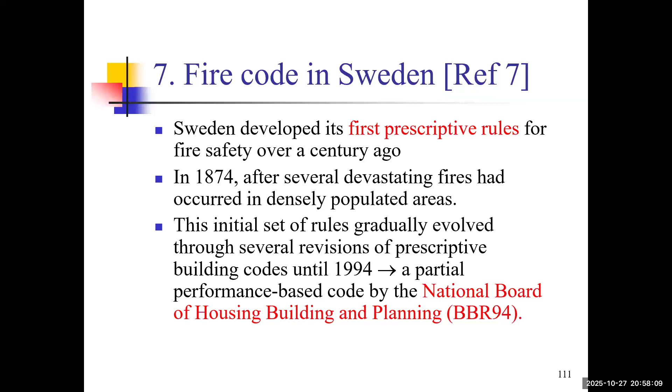A major step came in 1994 with the introduction of the partially performance-based code known as BBR, published by the National Board of Housing, Building and Planning. Sweden supported its performance-based framework with 2 handbooks that provide the necessary engineering methods, tools, and accessible procedures for fire engineering design and calculations. The English titles of these handbooks are Fire Safety Engineering Guidelines and Guidelines on Fire Safety Design of HVAC Systems.

For most common building types, a standard prescriptive approach is still widely used and fully acceptable. The code provides a set of deemed-to-satisfy designs that are pre-approved as meeting the performance requirements of BBR. This offers a simple and reliable compliance path for conventional projects.

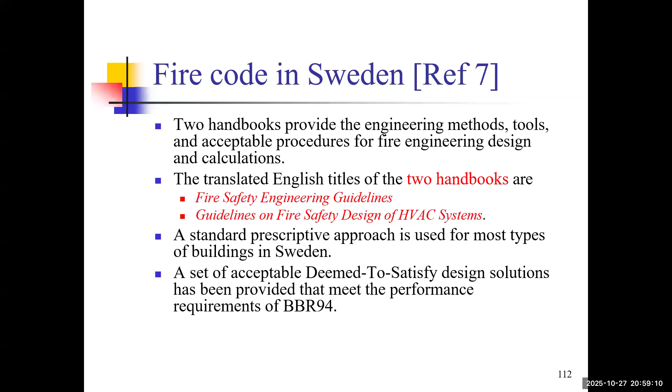The performance-based approach was in fact basically accepted in practice even before the formal introduction of BBR 94. This option is generally exercised when seeking an alternative method for a particular system design, rather than for a full building fire safety design.

A distinctive feature of the Swedish system is that there is no formal governmental inspection body that enforces building regulations for general compliance. Instead, the primary legal responsibility for verifying compliance lies with the building owner themselves. However, some individual systems, such as alarms, sprinklers, and ventilation systems, must be inspected regularly by certified persons and may be checked by the fire safety service.

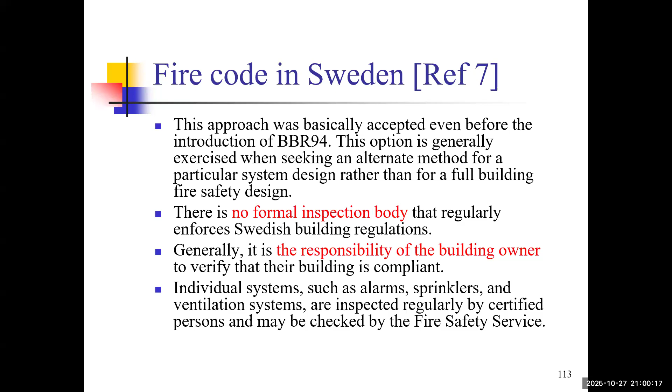That is the end of the journey of our class. In conclusion, our global tour has drawn upon numerous sources, from the Fundamental Safety Code Handbook to analysis of code development worldwide. This body of knowledge provides a comprehensive foundation for understanding the diverse philosophies, and mechanisms of global fire safety legislation. Understanding this international perspective is necessary for modern fire safety professionals, equipping you to work effectively across borders and to contribute meaningfully to the ongoing evolution of fire safety management worldwide.